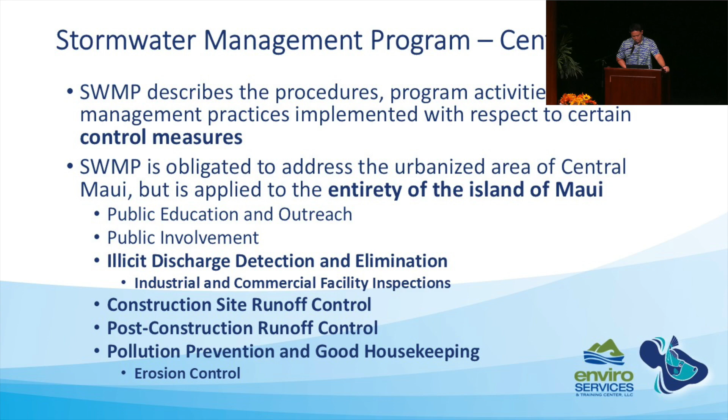So now that you know the background of Enviro Services' involvement in the stormwater management program for the state, this is what happened. Lahaina wildfire.

Total devastation. And I will share a little bit of personal connection to this. My family is actually from Maui, although I grew up on Oahu. I kind of grew up on Front Street, going to visit the different shops. One of my aunties actually had a t-shirt shop, one street off of Front Street. Seeing this kind of devastation was a little bit of heartbreak for me, but it just made my resolve even stronger to address the issues that came from this wildfire.

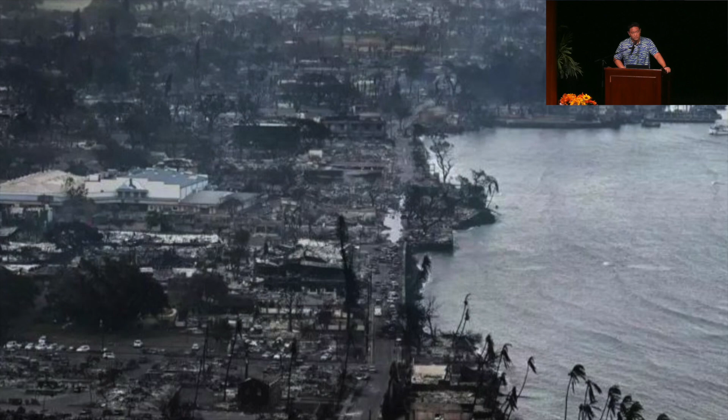So on August 8th, 2023, that's when the fire happened, and it was driven by hurricane force winds coming off the coast. Even though it wasn't a direct hit, those winds did spread that fire across a wide geographic area. More than 2,200 structures were affected or completely destroyed, $5.5 billion in damages, and over 2,100 acres burned. And of course, what's unmeasurable in terms of its worth is the 102 lives lost.

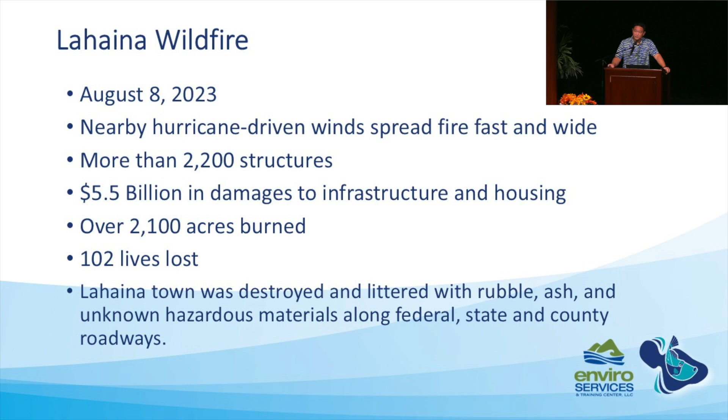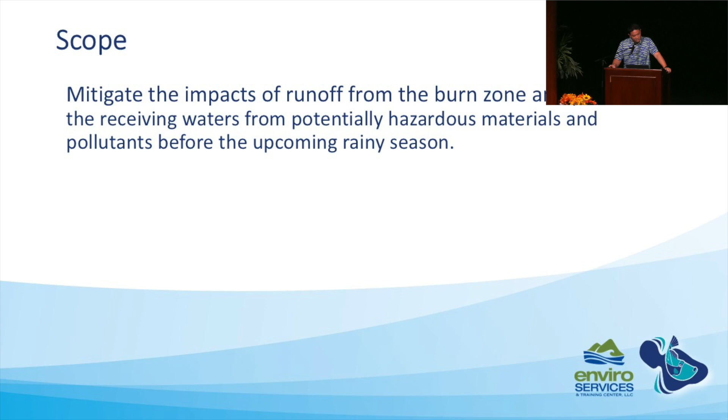Particularly if you are aware of how stormwater flow is calculated, it's a very short flow path to discharge, and also a short time of concentration. So compared to other wildfires that have happened across the country, those happen in the mountains typically, or in geographic areas where there's a lot of time to intercept pollutants from stormwater. This is not the case in Lahaina. It was shorefront, and we really had to come up with a catch-all system and approach to making sure that pollutants didn't end up in the ocean.

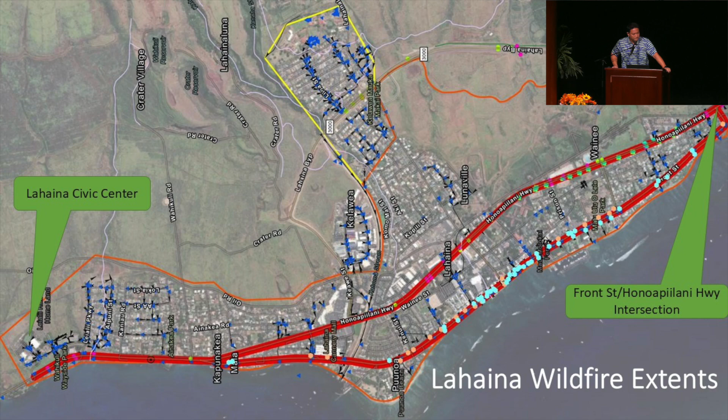So you can see, yes, this is a very large geographic area outlined by the watershed that's outlined in orange. It really encompassed from the Lahaina Civic Center on the north, all the way down to the Front Street Honoapiilani Highway intersection on the south. Another challenge that we faced, as I kind of alluded to, is we were in a race against time. So the fire happened on August 3rd, but the approaching rainy season provided a challenge of time to us to put in something quickly.

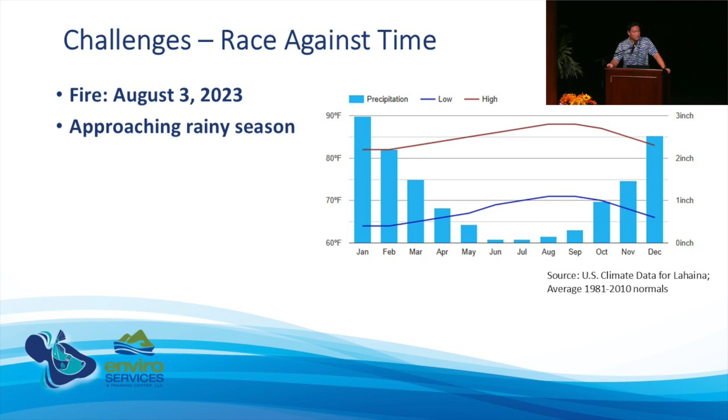And as part of that, and conflicting with that, was understanding the drainage systems. We weren't just dealing with the highways division's drainage systems, the state's drainage systems. We were dealing with County of Maui systems as well. And as part of that, we didn't understand all of what was actually out there. So we had a sub-consultant help us to do a condition assessment. And they got out there really quickly and gave us an idea of what we could use to intercept all the pollutants that would potentially run off.

One of the other challenges is that we had conflicting records from County of Maui drainage structures from what we actually observed out in the field. And so, when we're trying to figure out where water is going and how to intercept it, that provided a challenge. And as you can see, in order to fully understand the system, we had to get out there, but we also had to consider the safety of our staff while getting out there. So as you can see, we're fully dressed in PPE, respirators, and sometimes I think we're a little more prepared than some of the other consultants or government entities that were out there in the field trying to do their assessments.

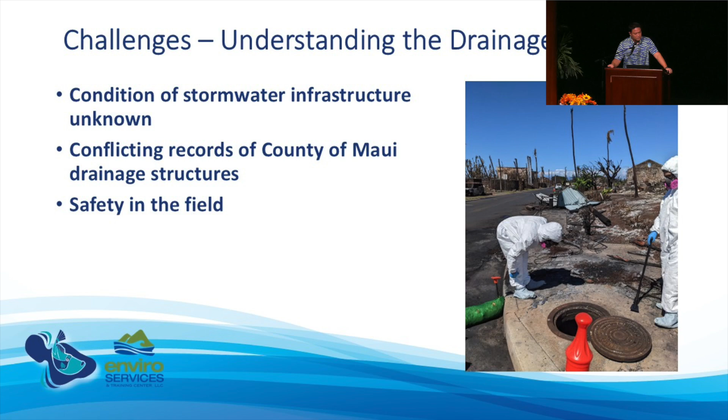Another challenge is that we didn't want to contribute to the problem. We don't want to add more chemicals. We don't want to get in the way. We don't want to make the problem worse by trying to get it better.

So part of that was not trampling on the cultural sites. So we were very careful to understand what the cultural impacts are of the work that we were doing. So if we were going to put out interceptors or baskets or anything like that to address the pollutants, we didn't want to compromise these cultural sites that Lahaina is known for. And in part of that, we also didn't want to hinder access for the cleanup that was going on around us.

So in the early part of the project, the question really came up, who is leading this effort? Is it the feds? Is it the state? Is it the county? But we all just wanted to do something. And so Highways Division actually took charge and got moving relatively quickly, within a month or so, and we started implementing BMPs right away.

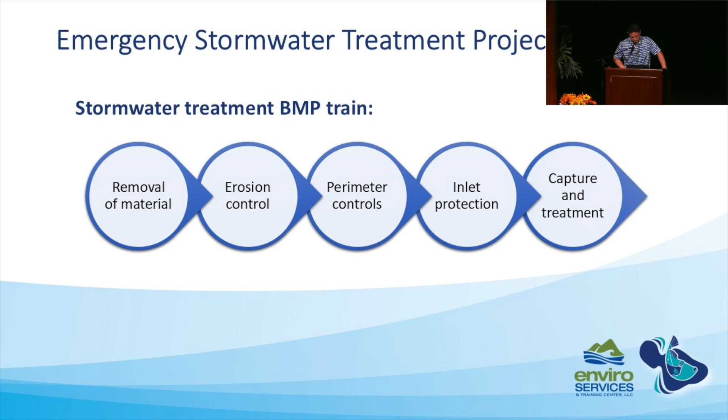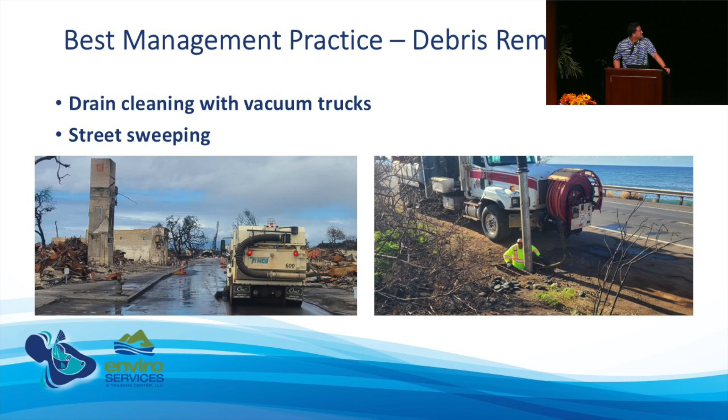So we're basically just implementing BMPs, and we're all here at this conference, and that's the buzzword, BMPs. But it really boils down to that. And as part of that, we implemented debris removal, and that was the easiest one to implement right away. So drain cleaning with vac trucks, street sweeping, and it was effective and quick. So 150 storm drain structures were cleaned, 144 pipes cleaned, and approximately 12 and a half miles of roadways were swept. And there was a regular program implemented for this street sweeping. And as you can see, 100 tons of material were collected.

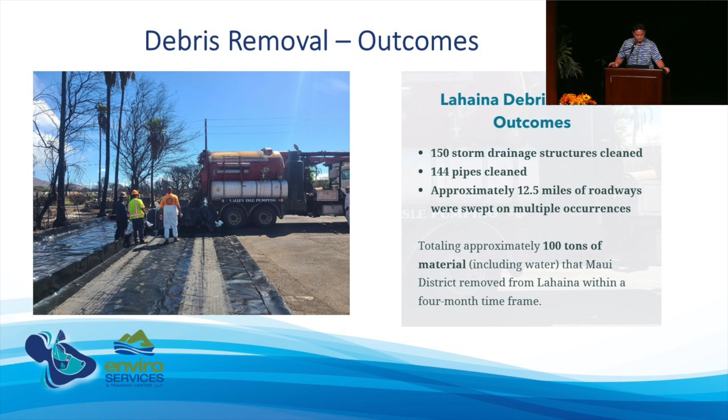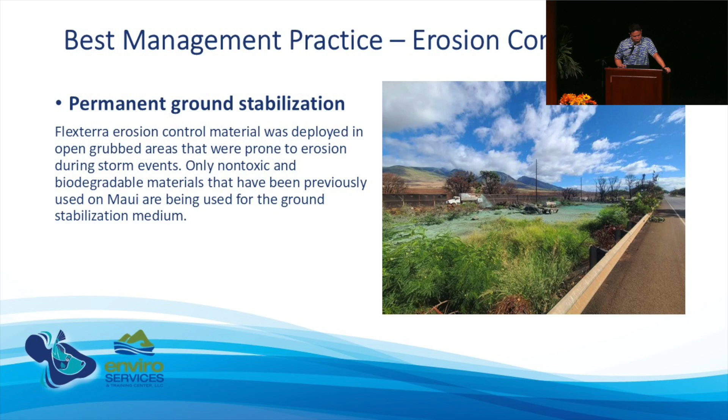Another layer that we implemented was erosion control. And part of that was coming up with ground stabilization material. And we evaluated quite a few different solutions. Getting back to the impact and not contributing to the problem, we wanted to find a product that could be applied to stabilize the soil without compromising the environmental health. And so we were able to find Flexterra, and this was applied to multiple areas across the burn zone to stabilize the soil that was now exposed due to the fire. And pictures speak 1,000 words. And you can see it implemented here.

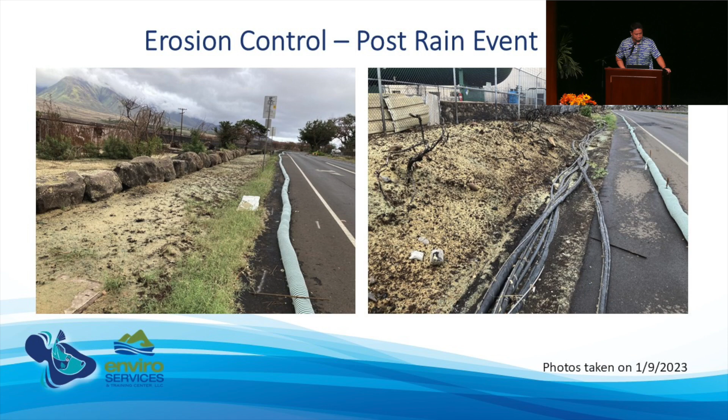So all in all, 8.8 acres of exposed areas were covered by this Flexterra, and this is not including the soil stabilizers that were applied by the EPA to properties.

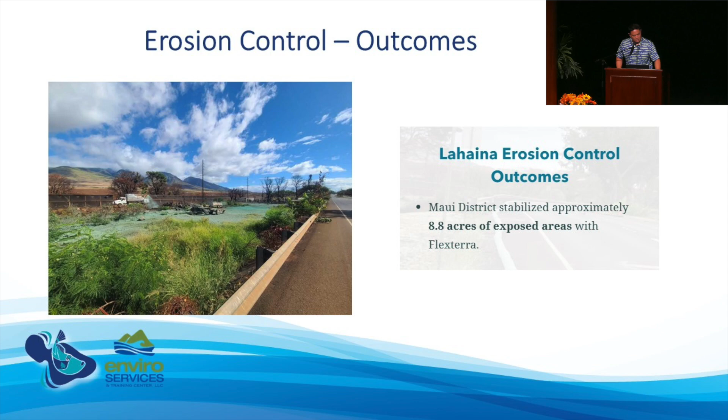And our next one is perimeter controls, and this is probably the most impactful one that we've implemented, and pretty easy to implement as well. And so, moving forward, I think this is something that can be used in future, knock on wood, hopefully not, future disasters like this. But we evaluated different materials and solutions, basically what could be deployed easily, what could be received quickly, and what would provide access. And so one of the considerations that we took into the evaluation of this solution was access.

If you were to put a sock down across a driveway and you're trying to provide access to cleanup crews, that would present a problem. But because the sock is able to be moved relatively easily versus a different solution that was kind of hardened, that's a consideration we had to take. And then ease of installation. The EnviroSoxx were actually just able to be staked into the ground, into the pavement, and again, easily removed if need be by cleanup crews needing access.

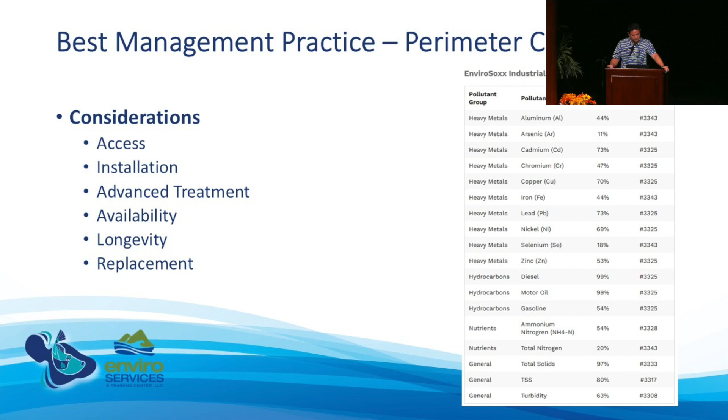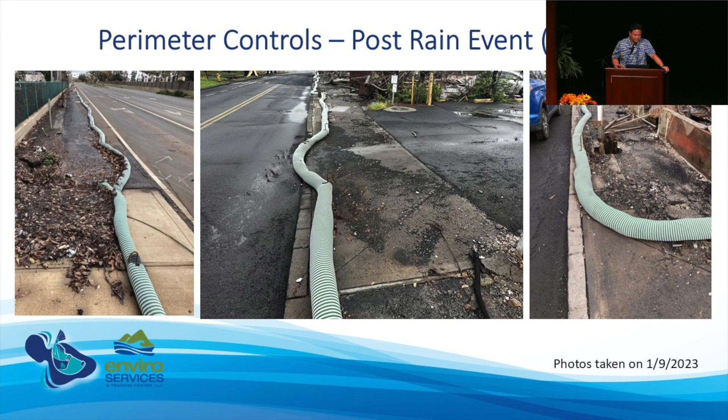So this is showing the deployment and showing the results after a rain event. Very effective. But in the end, we deployed 36,000 linear feet of these EnviroSoxx, and it basically encompassed all of Front Street as well as Honoapiilani Highway, the entire length through the town.

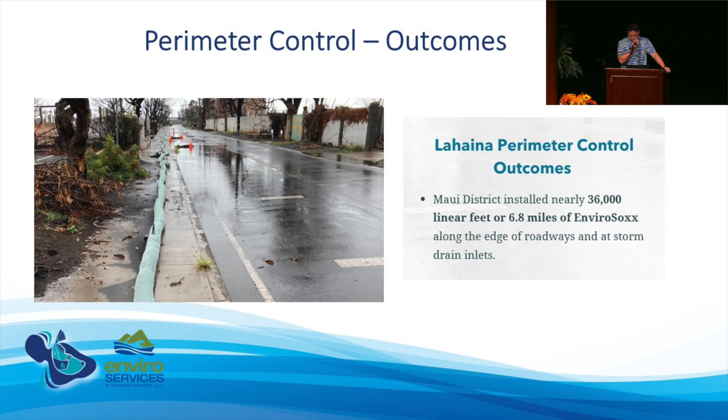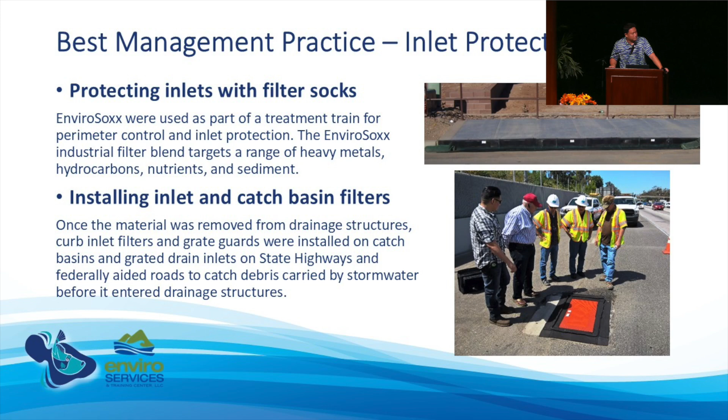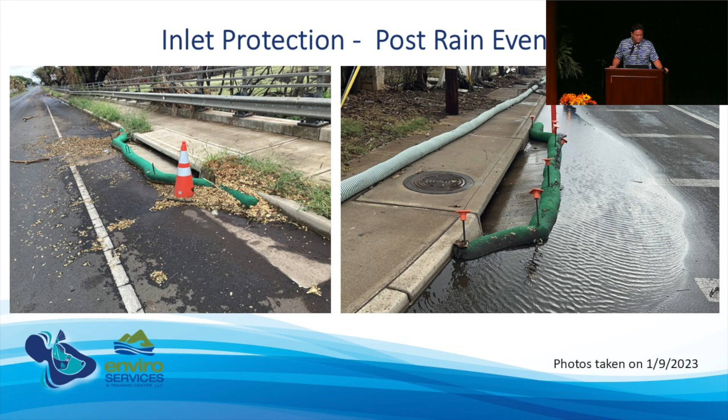We also implemented inlet protection, again, protecting the existing systems that were in place, whether that's the county or the state. We put these EnviroSoxx around each drain inlet as well. And then if there were inlets in traffic areas, we put this other type of protection that could be driven upon. Again, pictures showing that it is effective.

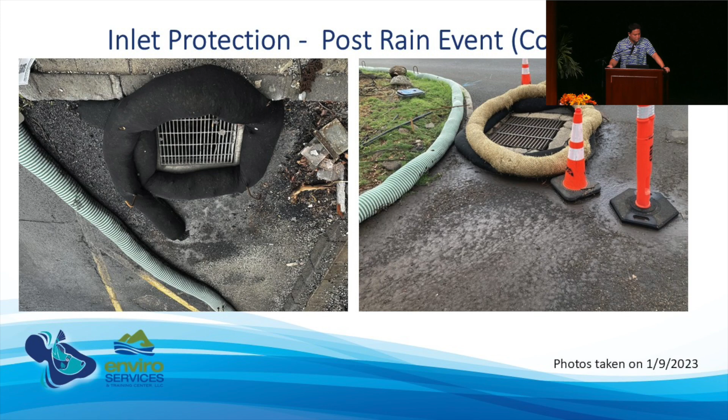The last thing that we implemented or tried to design in parallel with all of these measures was a capture and treatment system. It was a temporary system designed, again, using the existing drainage infrastructure of the county as well as the state, basically to catch it at the discharge points or right before, pump it up to a header, and all of that is transported and pumped to a receiving basin. From there, the water would be treated and discharged.

In the end, the system wasn't built because the county didn't want us to implement it because they had come up with their own solution. But I think it was a very robust system and a last resort kind of thing that we could have implemented and had gotten up to the point of construction.

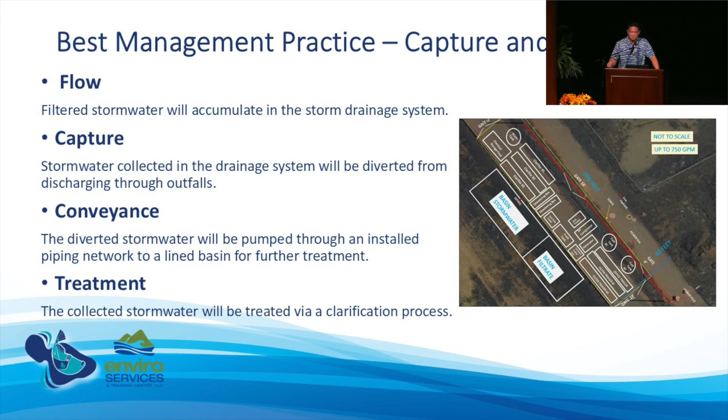So in the end, there were great outcomes. Water quality measured off the shores of Lahaina was clean, to the point where the DOH allowed for entry back into those shores for recreation. And that's it.

Any questions? I'm sure there are a lot. Yes. So what did the county implement then? I believe they actually ended up putting in their own inlet protection, perimeter controls, and basically took charge of Front Street again.

And that's part of the challenge that we faced at the beginning of this project, to figure out who was going to do what. And so the State Department of Transportation actually took charge and was going to deploy all of these solutions on county infrastructure. But the county ended up catching up right before construction of that capture and convey system.